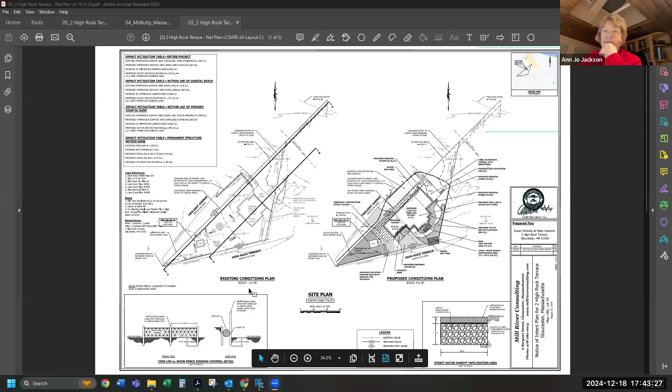So I can pull up the plan, I think that'll be easiest. Can you all see my screen? Yes. Great. So I think the main focus I'd like to touch on here is, again, we've raised the proposed structure.

We've made a few changes to the design where we've added a street water runoff infiltration area here, up against High Rock Terrace, to try to maintain and infiltrate that runoff coming from both of the high points off of the roadway, which drains onto the property.

We've also incorporated a different orientation for the side seasonal staircase that comes off the most northern temporary staircase off the deck, reorienting it to change the foot traffic patterns so it doesn't allow traversing through the proposed restoration area. I know that was a concern of the commission and abutters during our last meeting.

What we've done is tried to allow for neighborhood access on the existing manicured lawn along Twilight Avenue, along that right of way. I know there was major concern during our site visit, which some commissioners weren't able to attend, but it seemed to be a very frequently used area by the neighborhood, and we understand that.

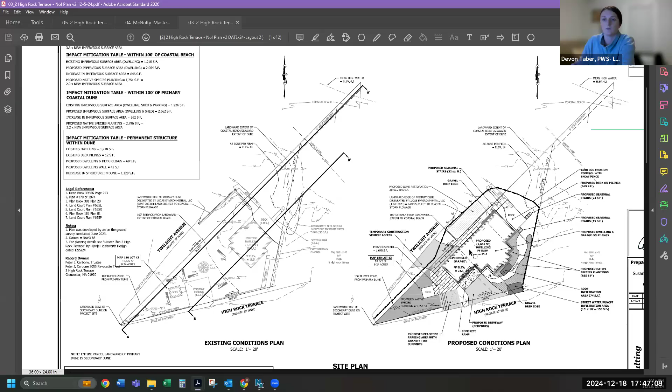Okay, good, thank you. I'll open this up for public comment. And if you would wait until the end of both public and commission comments to respond, I'd appreciate it. Is there anyone in the audience who wishes to comment on the project at 2 High Rock Terrace?

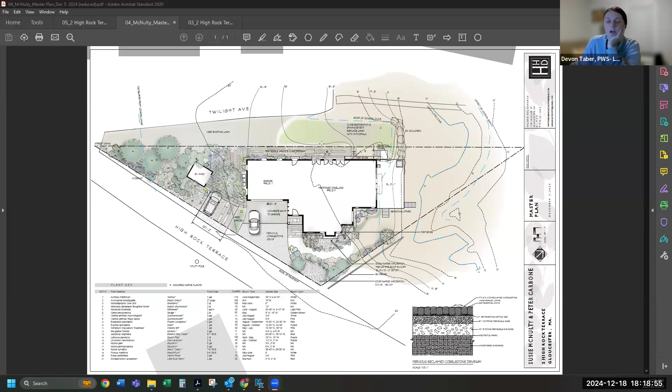With regards to the 2 feet above the dune for the piles, I think Anthony and/or Dan can answer that. Just to try to keep things going here, I hope that covers a synopsis of everything that was commented on. If there's anything else, any other information the commission needs, our team is happy to provide that and answer any other questions you might have.

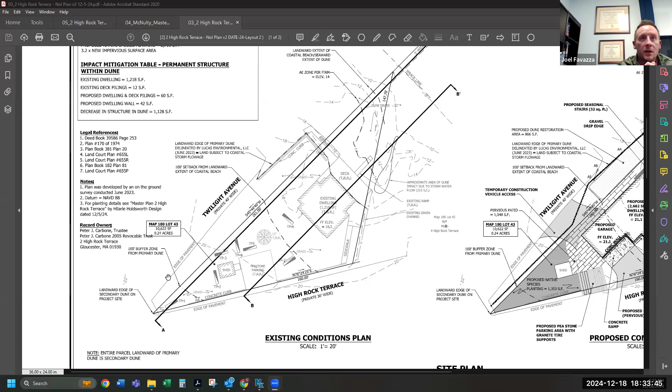It's from that edge of the property line where you're going to put the pea stone and granite pathway, right above where the thick black line is - that is the easement, yes. The way out to Twilight Avenue is 40 feet wide. So anything northwest of the thick black line, the line showing the edge, is within the layout of the right of way. And again, the first 20 feet are owned by my clients, subject to the right of others to pass and repass over it.

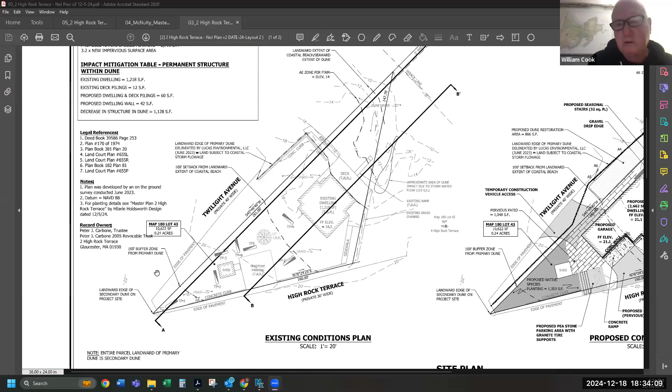The reason I wanted to specify that is, it's one thing if somebody has an easement and they're walking over the grass. Once you do the dune restoration and put beach grass in there, I believe there's going to be signs that say keep off the beach grass, which is effectively negating the easement. So to that point, you'll see on this plan that we've scaled things back so that the dune restoration only begins just about where the paved part of Twilight Avenue narrows down into that walkway. So anybody - to the degree my clients don't recall seeing anyone coming across the lawn, why would you come across the lawn when you can come down the street? But to the degree anybody currently uses the grass to get down Twilight Avenue, this would not impede them from doing the same and then still going left down to that path.

The dune restoration only comes to the point where you start being confined by where the existing dune has been restored. So the path of travel, to the degree it really exists across this grass, is not going to be impacted. The other thing I want to point out is we have on the one hand concern that if there's dune grass where there's currently lawn, people might not be able to walk through it, and on the other hand, a lack of concern. My clients, in the same way the neighbors have the right to walk down Twilight Avenue and get to the beach, my clients have the right to walk through their own property to get to the beach.

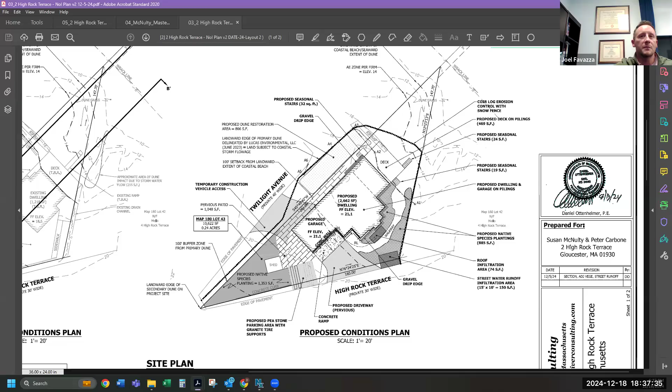There's Adirondack chairs out there. This is someone's yard, no one's walking through this yard. And if they did, using the right of way, from a commission standpoint, I don't know if Devon or someone can put up a satellite photo, I'll take a second to get that up to show.

You really don't want anyone traversing that way, because when you get to the end of what is currently the lawn on the Carbone property within the layout, you get to the existing dune on Long Beach. So anybody who walked past where we're trying to restore—if we said we're not going to restore anything, keep it all lawn as is—once you get into that area where we were otherwise going to restore, your options are either to your right, where you have a house you can't walk through, or in front of you and to your left, you have dune. So if you've gone that far, you've gone too far, because the only way to get to the beach from that part of the lawn is through the existing dune. By filling in this gap with restored dune, it isn't going to impact anybody.

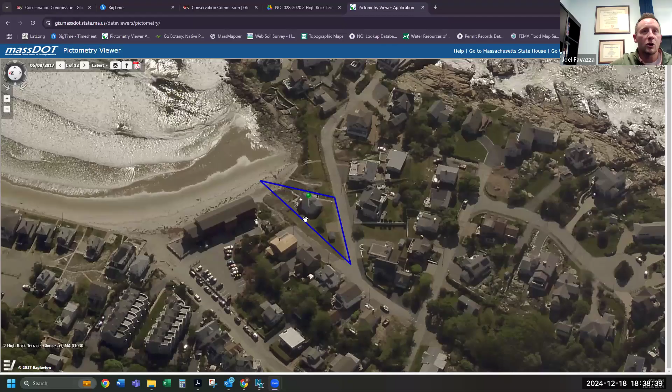We can zoom in, but basically where her cursor is, you can see the chairs I was talking about—that's the area we're going to restore as dune. If you're on foot there right now, besides the fact that you're clearly in someone's private yard, you can't get to the beach without crossing through dune that's already established. So it would behoove us to just fill in that little rectangular polygon, and you see where the pavement stops, right above where the cursor is—that's the part where you'd want anybody to hop down and use the road and the path anyway. You'd never want them to come past those chairs.

So the only person who loses in this is my clients. Right now they have a nice little lawn area where they throw chairs and stuff, and that's all going to become protected dune. For the neighborhood, it makes no sense for them to walk where those chairs are—you can't get to the beach from there. They would still be able to walk down the grass part along the pavement and then hop down onto the path.

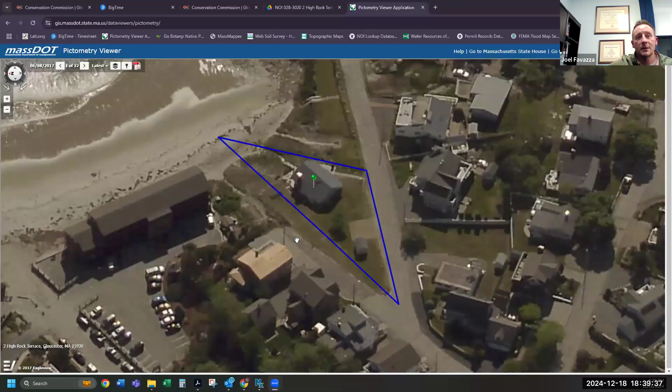Okay, thank you. Thank you. Okay, so I'm seeing a continuation in your future.

When would you like to continue to? My only concern is you'll need time to get the third party reviewer on board, and we'll need to have a conversation with them. I'm okay if Devin's okay with having this go out a couple meetings, but if you have to come back to vote to hire the third party reviewer, I'll make sure that's all in place so that after the holidays, if Chuck says he's got this person available, we can work with them through January and show up at the first February meeting ready to go. But if we continue to February and don't get to move forward with a third party reviewer until February, then I'd request an earlier date, if that makes sense.

Okay, Chuck, do we need to have a formal vote on a third party reviewer? No, once I receive some proposals, I can circulate them to you, and I don't believe that needs to be a formal vote in a meeting for you guys to approve that. Okay, sounds good, and we will all respond quickly, I'm sure.

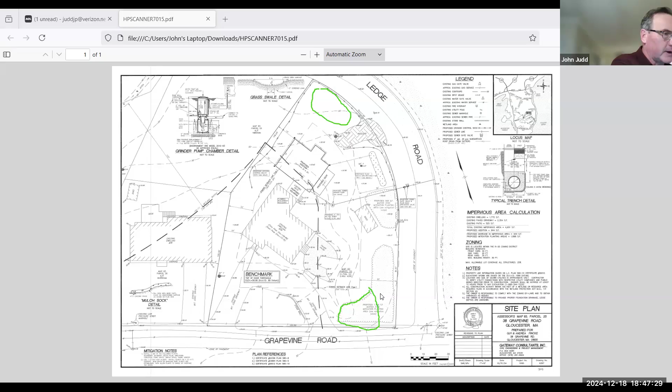Yes, Madam Chair, I just made a sketch to try to mimic what Peter has drawn. Okay, in that case, I think we're ready to move forward. I'll entertain a motion to close the public hearing.

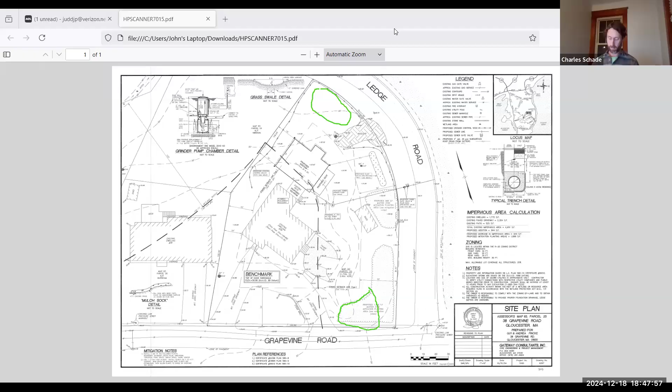Charpentier moves to close the public hearing for NOI 0283031 at 38 Grapevine Road. Commissioner Cook seconds. Roll call: Member Charpentier, yes. Member Cook, yes. Member Sargent, yes. Member Materi, yes. Member Bella, yes. Member Jackson, yes.

And Linda, would you like to make another motion? Sure, Charpentier moves to approve NOI 0283031 at 38 Grapevine Road with the aforementioned conditions of a 2-year monitoring plan for the mitigation, and that the client have the septic permit in hand before construction begins.

Do I have a second? Commissioner Cook seconds. Roll call: Member Charpentier, yes. Member Cook, yes. Member Sargent, yes. Member Materi, yes. Member Bella, yes. Member Jackson, yes. Okay, you're all set, sir.

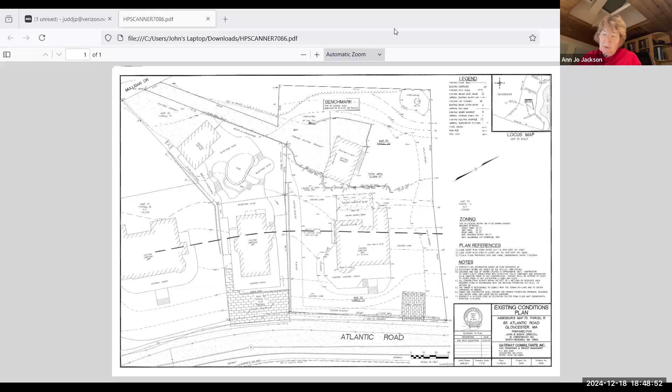Thank you. Okay Rob, I have to pull you out of retirement. I'm recusing on the ANRAD. All righty.

So next up is ANRAD 0283030 at 65 Atlantic Road, to update delineation.

Chuck, did you bring in somebody for this? Yeah, that would be me. Name and address for the record, Chairman. John Judd representing the applicant for this continued hearing at 65 Atlantic Road for the application for resource area delineation. This was presented at the last hearing, again waiting for the DEP to post a number, but also there was a question that Chuck had pointed up.

Whether the elevation—maybe I'll just blow this up a little bit here to show how the elevation as shown on the FEMA maps shows the velocity zone at elevation 34. Chuck had mentioned or questioned whether that line should actually come through the building.

We subsequently went out to the property and measured this stone wall that is installed here, and it goes along the front of this existing garage. We have spot grades here that show, although it's slightly above it, it is above elevation 34, and we just followed that contour along the wall and over to match the existing spot grades.

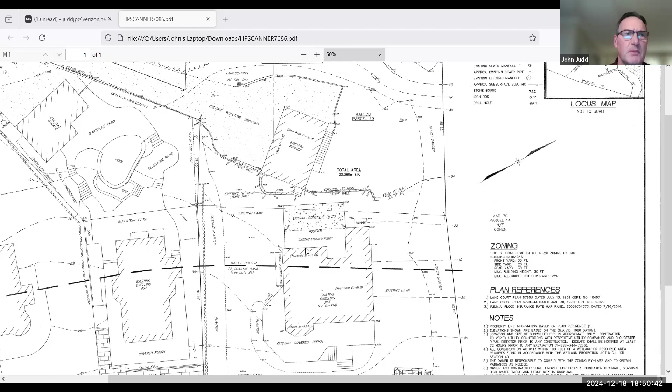So we have spot grades along the top and bottom of the wall, and that's basically the limit of elevation 34 as shown here. The other resource area is obviously the coastal bank across the street and the associated 100-foot buffer as shown there. And I can answer any questions you might have.

Normally, Chuck, we go through public comments—do we do these on delineations? I can never remember. Chuck, you there? You know, we're not talking about a project, we're just talking about the resource delineation, so I'm not sure without the public actually going onto the property and looking at the site, how they'd know much about the delineation.

I guess, well, it's been noticed, so maybe see if there are any public comments, might as well. So you want me to just—I might as well do it and get people, in case somebody's out there. Okay, so anyone who wishes to speak for or against the delineation located at—

Sorry, I'm losing my voice here. 65 Atlantic Road may do so by hitting the raise your hand button at the bottom of your screen or hitting star 9 on your phone or handheld device. We currently have 9 attendees and there are no hands up. Seeing none, hearing none, close public comment period.

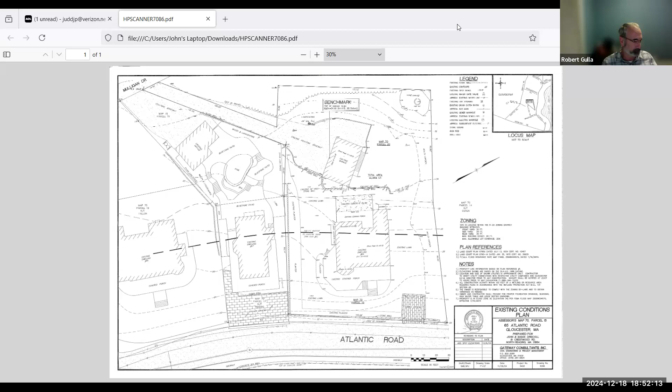Next up would be Commissioner roll call comments. Member Charpentier, no comment. Member Cook, no comments. Member Sargent, no comment. Member Terry, no comment. Member Vella, no comment.

Okay, so with that, we want to move on to approval and closing.

Charpentier moves to close the public hearing for Ann Red 0283030 at 65 Atlantic Road. Commissioner Cook seconds. Roll call: Member Charpentier, Yes. Member Cook, Yes. Member Sargent, Yes. Member Terry, Yes. Member Vella, Yes.

Charpentier, did we get everybody? Yep. Okay, Charpentier moves to approve ANRAD 0283030 at 65 Atlantic Road. Commissioner Cook seconds. Roll call: Member Charpentier, Yes. Member Cook, Yes. Member Sargent, Yes. Member Terry, Yes. Member Vella, Yes.

All right, you're all set. Okay, thank you very much. Happy holidays to everybody. You too.

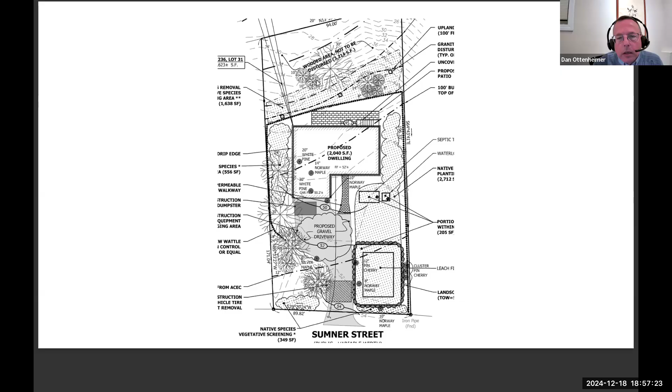So this is what we have submitted for your review. You can see the trees to be removed identified here, obviously where the house is and where the driveway is going. The majority of the trees along the southern side here, as well as on the slope, are going to remain.

For perspective, there are not a ton of trees on this site, so I wanted you to see that. This is the slope heading down. These are the trees that will not be touched, will not be disturbed whatsoever. The work is happening to the right of these trees.

I was also asked what's different between the previous application and this one. For one, we've had neighbor communication — we reached out to all the neighbors, and 3 of them met with us before we even submitted to you. As a result of their feedback, we redesigned the house to move it further away from the side property lines. Second, the owner is now the applicant, not a builder who was proposing to purchase the property.

The previous application had a deck and a wall and fill material in the upland edge — we have removed those. The previous application had work in a salt marsh buffer zone — we have removed that. And we are voluntarily offering up a do-not-disturb zone.

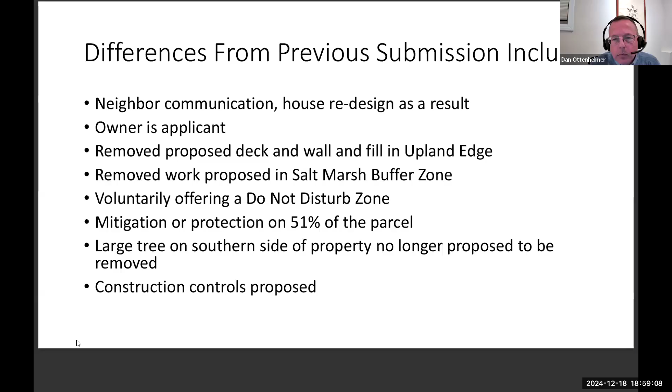We are mitigating or protecting 51% of the parcel, which is a huge percentage compared to most other mitigation projects. The previous application was proposing to remove a large tree on the southern side of the property, and we're not proposing to do that. The previous application also did not have construction controls like dumpster location, a staging area identified, and riprap placed at the entrance to keep dirt off the road. We now have those proposed, so there are significant differences from the previous submission.

We are proposing to work only within the buffer zone to coastal bank, as defined in the Wetlands Protection Act, and buffer zone to the upland edge, as defined in the Gloucester Wetlands Ordinance. We are not proposing any work in a resource area.

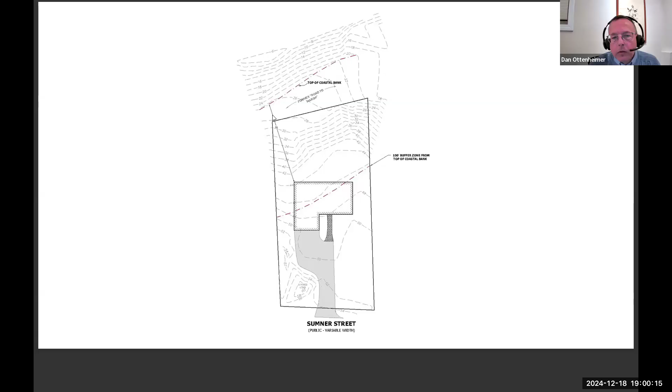The other feature is this flat area here, not owned by us, that used to be a road. So if this road is not a risk to the coastal bank, then I certainly can't see that this work would be a risk to the coastal bank.

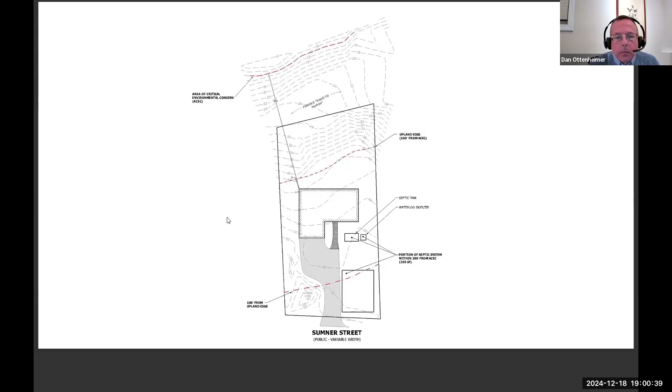The other buffer zone is the upland edge, defined in the Gloucester Wetlands Ordinance. We're not proposing any work in the upland edge itself, but in the buffer zone to the upland edge. The ordinance specifically says it's meant to apply to newly created lots, and specifically says that if the parcel existed prior to 1961, the commission can allow the work to proceed.

This shows the subdivision of this land in 1921, creating Lot 2, which is the one we're talking about here, which was purchased and is still owned today by the Fiallo family, having been purchased in 1937.

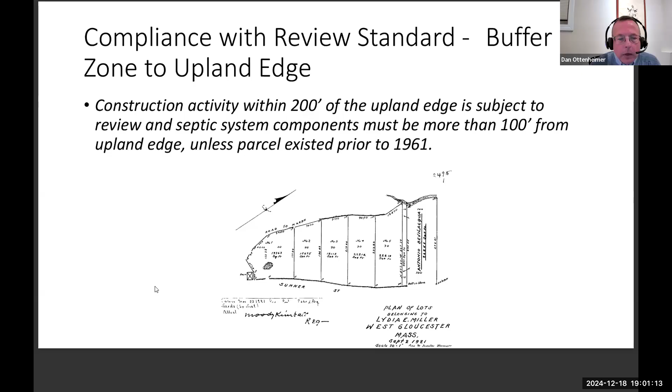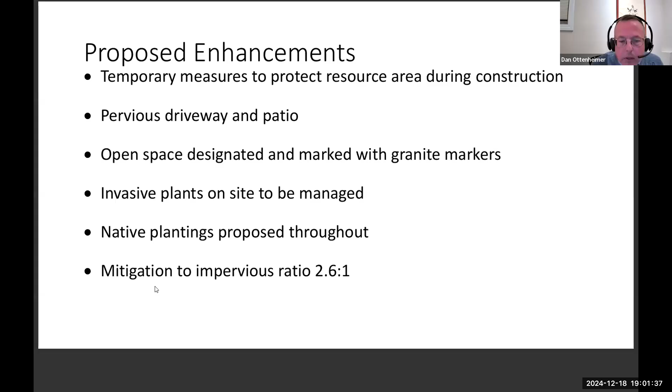So what are our enhancements? We have temporary measures to protect the resource area, a pervious driveway, pervious patio, and open space being offered up as a voluntary give. We're managing invasive plants on the site, proposing native plantings, and mitigating the impervious area at a ratio of 2.6 to 1.

So 51% of the parcel is going to be preserved. 4,208 square feet will be a do-not-disturb zone. There will be extensive native species enhancements and plantings, and extensive benefits to the natural resources in the area.

In conclusion, we believe the standards for work in a buffer zone have been met. DEP has provided no technical comments, and we kindly ask that you consider issuing an order of conditions. Okay, thank you very much.